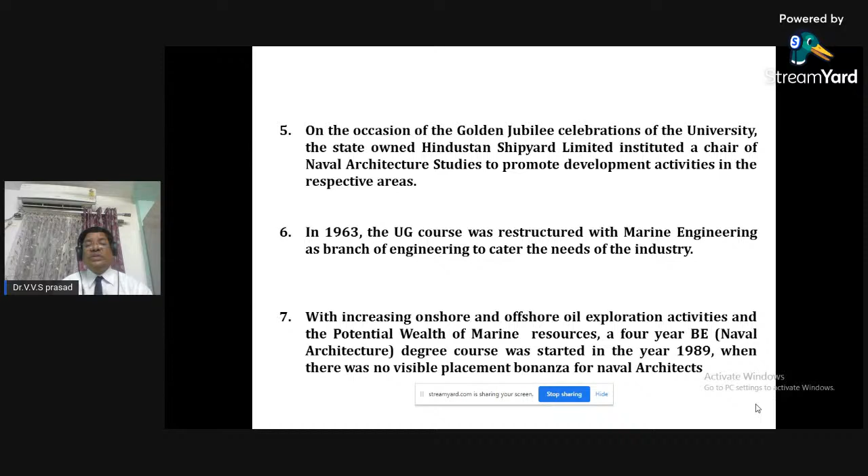In the year 1963, the undergraduate course was restructured with marine engineering as a branch of engineering to cater to the needs of the industry. With increasing offshore and onshore oil exploration activities and the potential wealth of marine resources, a 4-year naval architecture course was started in the year 1989, when there was no visible placement bonanza for naval architects.

The alumni of the department are holding responsible positions in the merchant navy, Indian Navy, shipping, offshore industries in India, abroad, and marine industries. The department has MOUs with the Institute of Marine Engineers, Naval Science and Technological Laboratory Visakhapatnam, Hindustan Shipyard Limited Visakhapatnam, and Dredging Corporation of India Visakhapatnam.

The main thing is the MOU started with IME(I), Visakhapatnam branch, is to start a facilitation center at Visakhapatnam. There is no such center in Visakhapatnam or in and around Andhra Pradesh. So recently, our Honorable Vice Chancellor, Professor PVGD Prasad Reddy Garu, has agreed to start one facilitation center in Visakhapatnam.

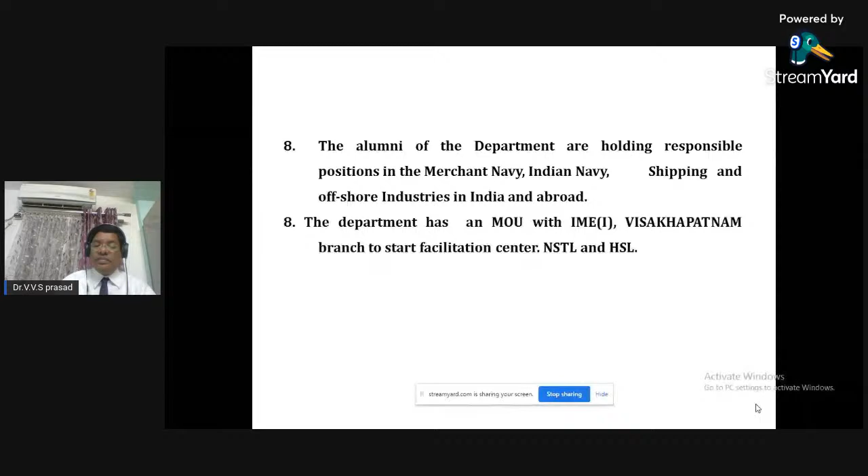What are the organizations recruiting students of this department? Mainly Indian Navy, Mazagon Dock Limited Mumbai, DRDO mainly NSTL, NSDRC Visakhapatnam, Hindustan Shipyard Limited Visakhapatnam, Visakhapatnam Port Trust, Dredging Corporation of India, Bharati Shipyard Limited, Cochin Shipyard, Indian Register of Shipping, DNV, American Bureau of Shipping, L&T, and software companies like

TCS, Wipro, and other companies related to core engineering. They are getting core engineering projects from abroad as well as in India.

Origin of the department: the department was actually merged in mechanical engineering. The marine engineering electives were started in the year 1963. Bachelor of Engineering in Marine started in the year 1971. The Department of Marine Engineering bifurcated from mechanical engineering in the year 1981, dividing into the mechanical department and marine engineering department.

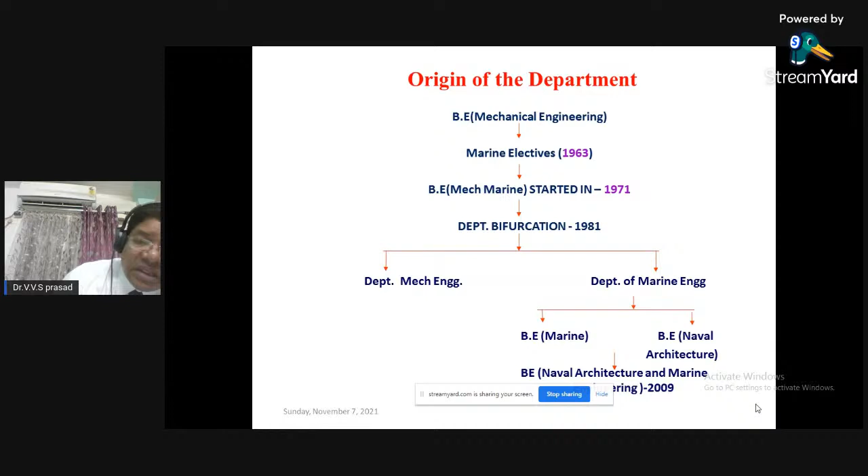At that time, there were two courses offered by the Department of Marine Engineering at the UG level: one is BE in Marine Engineering, the second one is BE in Naval Architecture. In the year 2009, we merged these two branches and now we call it Naval Architecture and Marine Engineering, with 30 students plus NRI candidates.

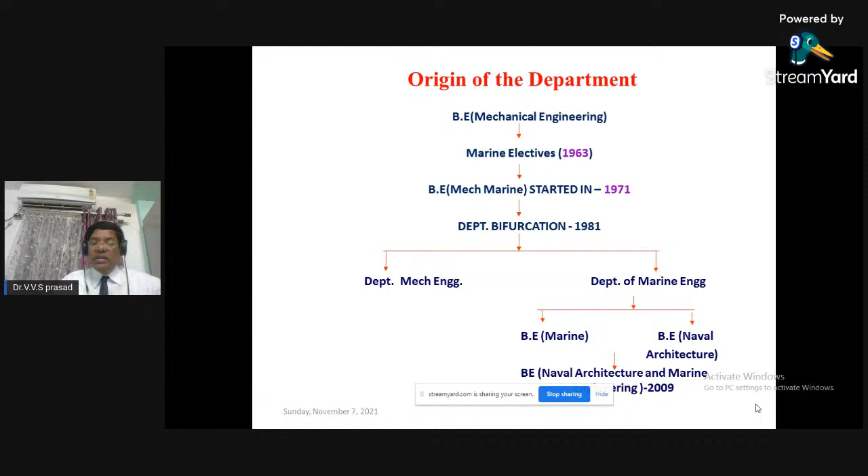Faculty are not only involved in research and teaching, but also in curriculum development, syllabus revisions, conducting training programs, short-term courses, workshops, industry-institute interaction, seminars, R&D, and some consultancy, pursuing PhD programs, presenting technical papers at national and international levels, attending conferences within the country and abroad, attending refresher courses, training programs, pedagogical training at prestigious institutes like IITs, IIMs, management programs at IIMs, and delivering guest lectures as part of knowledge sharing between industry and institution.

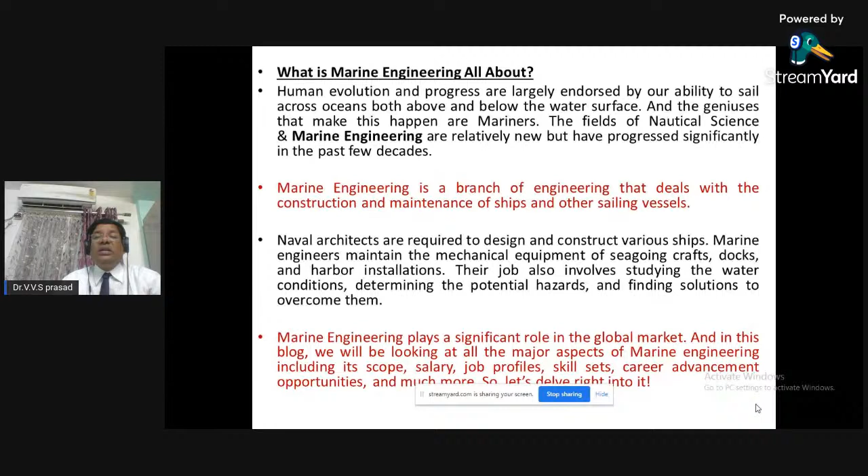Coming to what is marine engineering: human evolution and progress are largely owed to our ability to sail across oceans, both above and below the water surface, and the geniuses who make this happen are mariners. The fields of nautical science and marine engineering are relatively new but have progressed significantly in the past few decades.

Marine engineering is a branch of engineering that deals with the construction and maintenance of ships and other sailing vessels. Naval architects are required to design and construct various ships. This is the main difference between a marine engineer and a naval architect: marine engineering is for maintaining the mechanical equipment of seagoing crafts, docks, and harbor installations, but naval architects are required to design and construct various ships.

Their job also involves studying water conditions, determining potential hazards, and finding solutions to overcome them. Marine engineering plays a significant role in the global market, and in this blog we will be looking at all the major aspects of marine engineering, including its scope, salary, job profiles, skill sets, career advancement opportunities, and much more. So let us delve right into it.

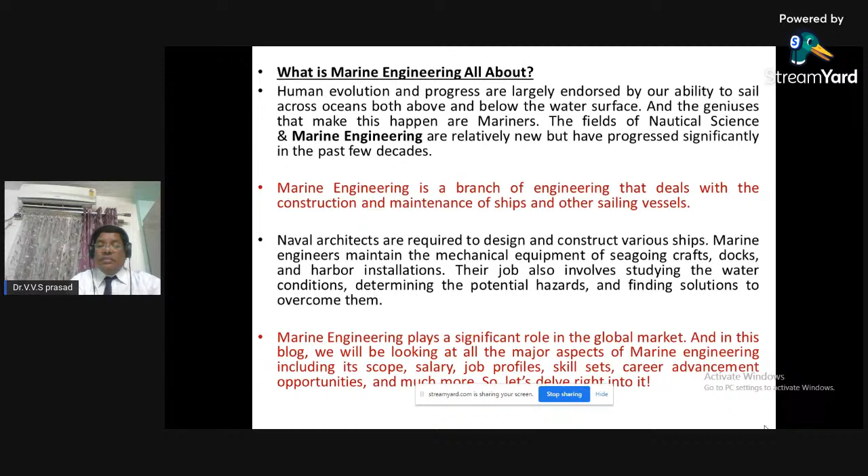What is the scope of marine engineering? Marine engineering is an emerging field with a massive scope for experimentation and career advancement. The shipping industry generates a myriad of career opportunities each year that are stable and lucrative. Skilled marine engineers have a rising demand in the global market.

A recent report suggests that the employment rate of marine engineers will witness a 12% growth till 2026. The growth is faster than the average growth seen in all other occupations. Some companies where marine engineers land jobs include shipping firms, Indian Navy, shipyards, Indian manufacturing companies, shipbuilding companies, ship design firms, maritime universities, research institutions, etc.

Let us further explore the job profiles of marine engineers. Marine engineer job profiles and salary.

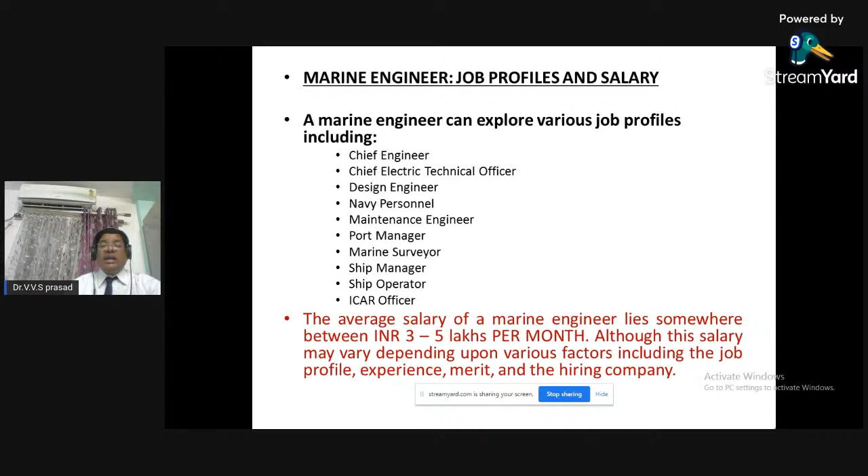Required skill sets for marine engineers. Apart from an affinity to the oceans and amazing swimming or diving skills, the following are the skills required for the field of marine engineering.

Reading comprehension, knowledge about mathematics, physics, and engineering concepts, design skills and critical thinking, effective spoken and written communication, knowledge about equipment requirement and selection of equipment, cooperation and coordination, scientific skill, problem solving and analytical skill, quality control analysis, accurate judgment and decision making, experimentation and active learning skills, attention to details, and time management.

So, in short, a marine engineer is a jack of all trades and master of all engineering branches.

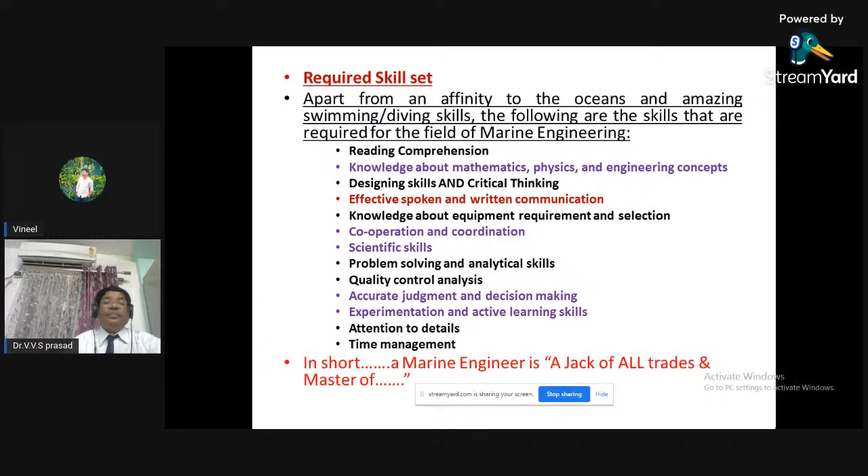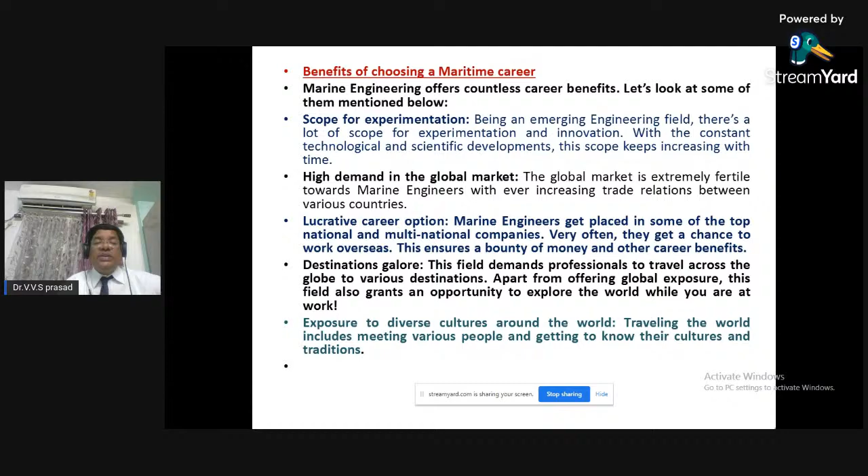Exposure to diverse culture around the world. Traveling the world includes meeting various people and getting to know their cultures and traditions. Not only that, there's also professionalism and adaptability, and an adventurous life.

Considering professionalism and adaptability, as this field has a global reach, it is vital. It teaches individuals to smoothly work in teams with people of diverse backgrounds and adapt themselves to any situations or challenges that may occur during their service.

Adventurous life: sailing across oceans is an adventure in itself, and working in this field ensures that you have a thrilling and adventurous lifestyle. This maritime career can be the best choice for those who are adventurous, have a passion to work overseas, have an affinity for the oceans, and are in search of career opportunities.

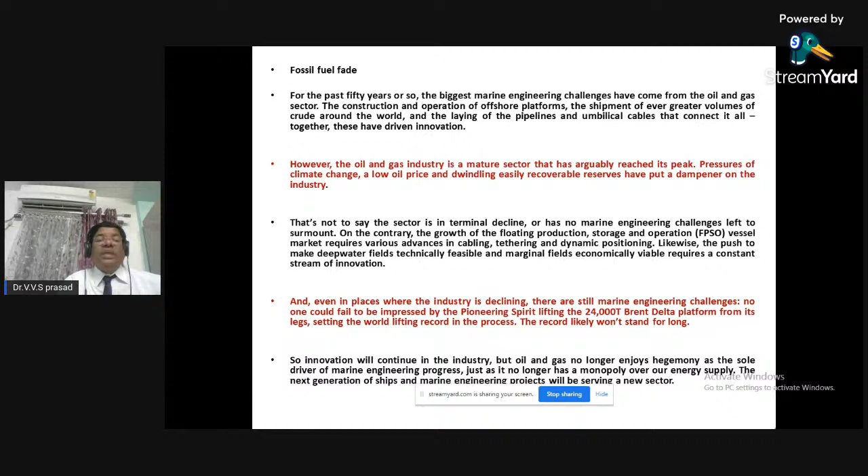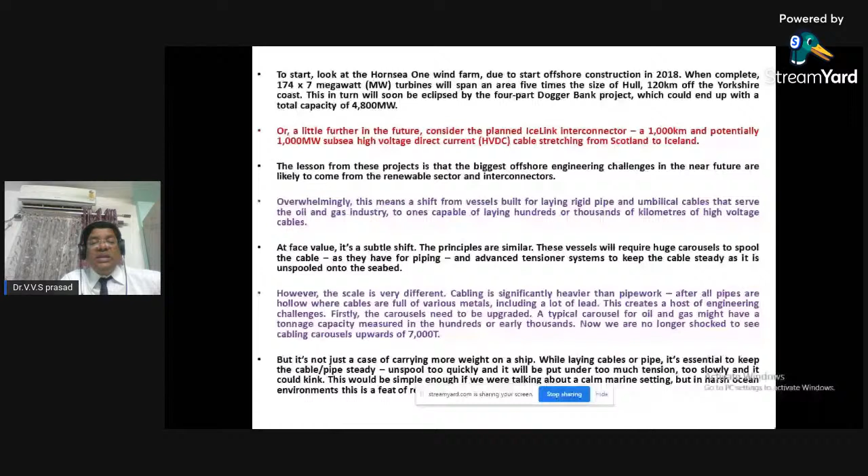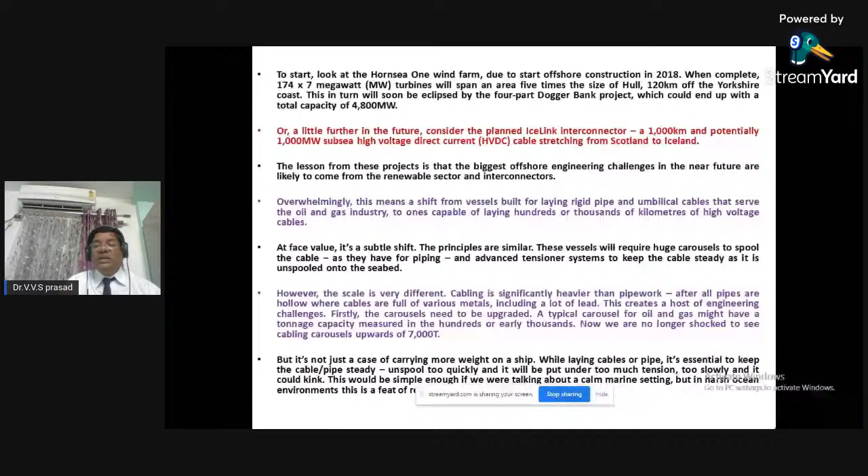But it is not just a case of carrying more weight on the ship. While laying cables or pipes, it is essential to keep them steady - unspooled too quickly and it will be put under too much tension, too slowly and it could kink. This would be simple enough in a calm marine engineering setting, but in a harsh ocean environment the facts are different.

To lay the cable safely at a steady pace, dynamic positioning systems must keep the ship in place, and the cabling equipment has to be capable of handling the pitch and heave of the sea. This was true of pipework too, but becomes much harder with heavier, often inflexible cabling.

However, perhaps the biggest challenge is that where oil and gas flexproducts are fairly uniform, cable laying requires much more bespoke design. The heavier carousel limits the options for where to place it on the ship, which has knock-on effects for fitting in the surrounding equipment too. As such, the entire deck layout comes down to the specific characteristics of the cable, driving much more tailored vessel solutions for each end user.

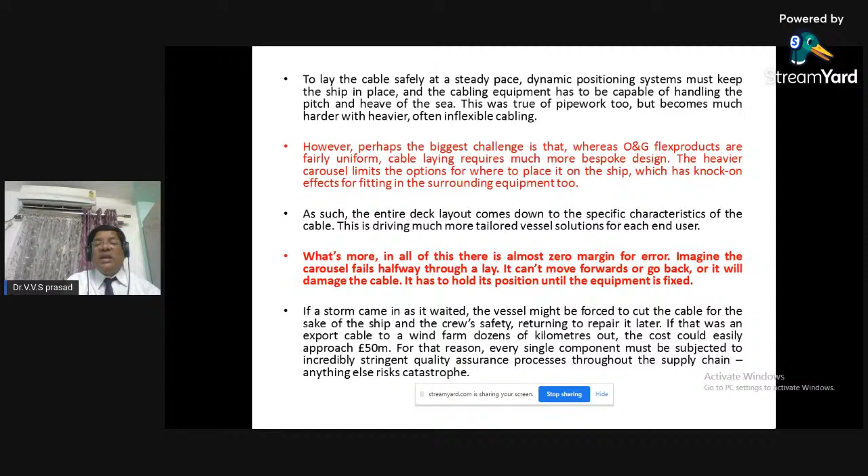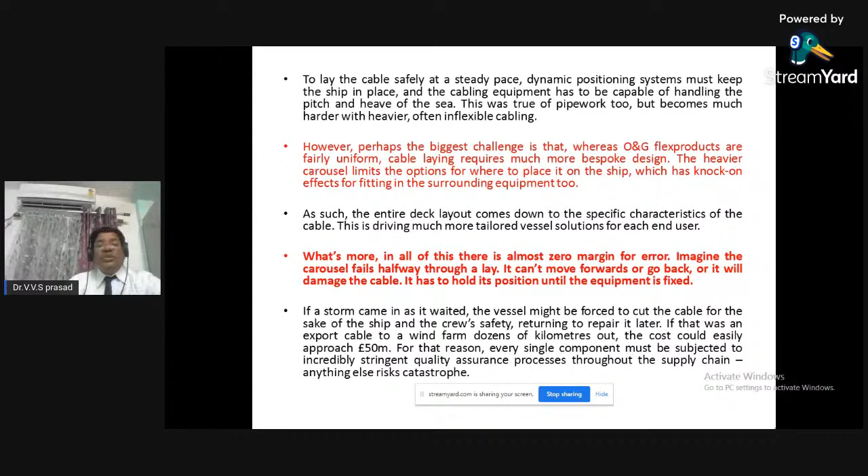What's more, in all this, there is almost zero margin for error. Imagine the carousel fails halfway through a lay. The vessel can't move forward or go back, or it will damage the cable. It has to hold its position until the equipment is fixed. If a storm came in as it waited, the vessel might be forced to cut the cable for the sake of ship and crew safety, returning to repair it later.

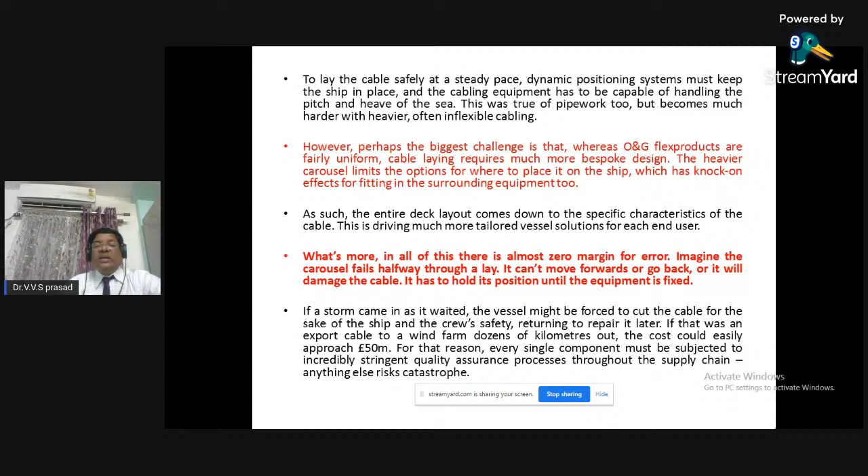If that was an export cable to a wind farm dozens of kilometers out, the cost could easily approach 50 million pounds. For that reason, every single component must be subjected to incredibly stringent quality assurance processes throughout the supply chain. Anything else risks catastrophe.

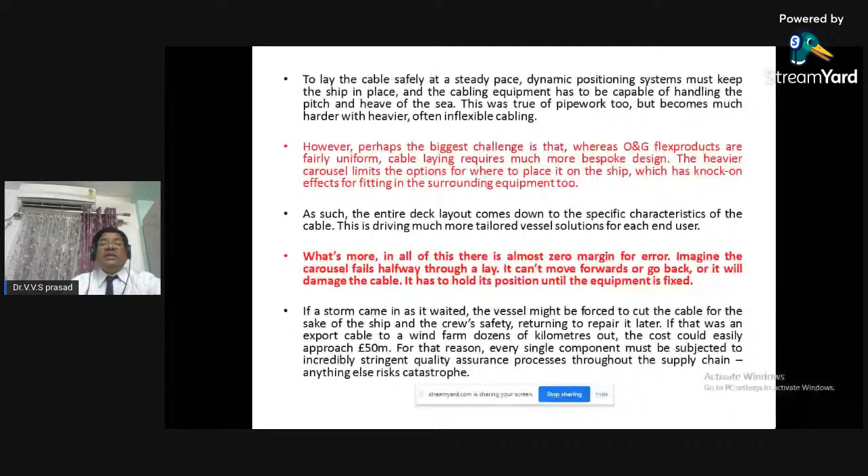Looking further ahead, these challenges are only going to increase. In 10 years, the 7,000 ton carousel that seems so gargantuan today will seem unremarkable. That's because wind farms are evolving - for example, compare the Westermost Rough wind farm to the aforementioned Hornsea One. Westermost Rough, operational since 2015, lies 8 kilometers off the coast, covers over 35 square kilometers, and consists of 35 6-megawatt turbines.

Compare that to Hornsea One: it's located 120 kilometers off the coast, covers 407 square kilometers, and consists of 174 7-megawatt turbines. That translates to a lot of extra cabling as wind farms grow in area.

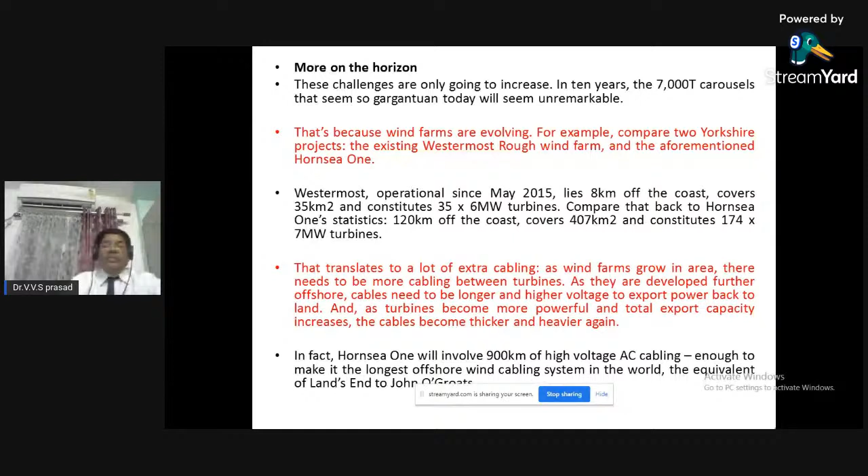There needs to be more cabling between turbines as they are developed further. Offshore cables need to be longer and higher voltage to export power back to land. And as turbines become more powerful and total export capacity increases, the cable becomes thicker and heavier again. In fact, one project will involve 900 kilometers of high voltage AC cabling, making it the longest offshore wind cabling system in the world.

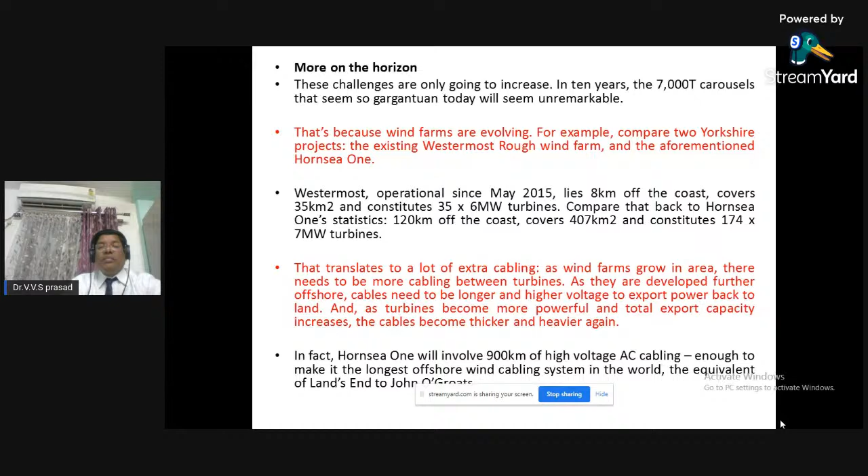It won't be long before the industry sees its first five-figure tonnage carousel. This will create real challenges for the marine engineering and shipbuilding industries. As tonnage increases, there will be fewer viable existing vessels for conversion, so shipbuilders can expect orders for larger new-built vessels designed for maximum stability in rough seas.

Marine engineers, for their part, will be occupied designing even more advanced carousels, tensioners, and related equipment to handle increasingly strenuous cable requirements, not forgetting the shoreside equipment needed to load the vessel in the first place. As society changes the way it approaches energy, the marine engineering and shipbuilding industries will change with it, adapting to serve new sectors and meet new challenges. After all, it's what they have always done.

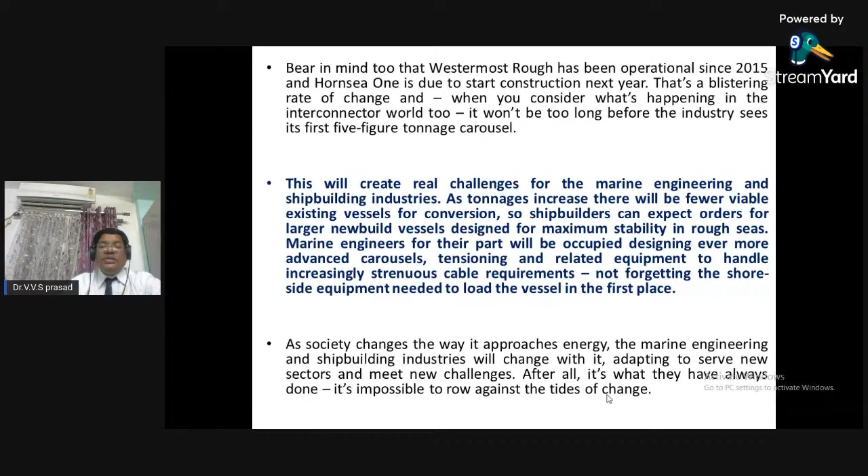It's impossible to row against the tides of change. And other challenges of shipping jobs - according to classification, shipping jobs or working at sea has been classified as one of the 10 most dangerous jobs in the world.

Although, as an outsider, it might sound surprising, but not when you consider how people think of it as a glamorous job. Ask a seaman, and he would enumerate various difficulties attached with the job. Careful examination of the prospective hazards makes one realize that this job is not for the weak-hearted. Those who get homesick easily find it difficult to work in a harsh environment. In every profession, there are a variety of professional hazards to deal with, and a person's ability to perform any particular job is tested on the basis of his response to these hazards.

Similarly, there are ways to deal with the professional problems faced on ships, and one should not be discouraged from taking up an exciting and rewarding career in the merchant navy. Strict physical fitness is of utmost importance, as any kind of shipping job is quite demanding, and the hardships one usually faces cannot be coped with without health conditions bordering on exceptional.

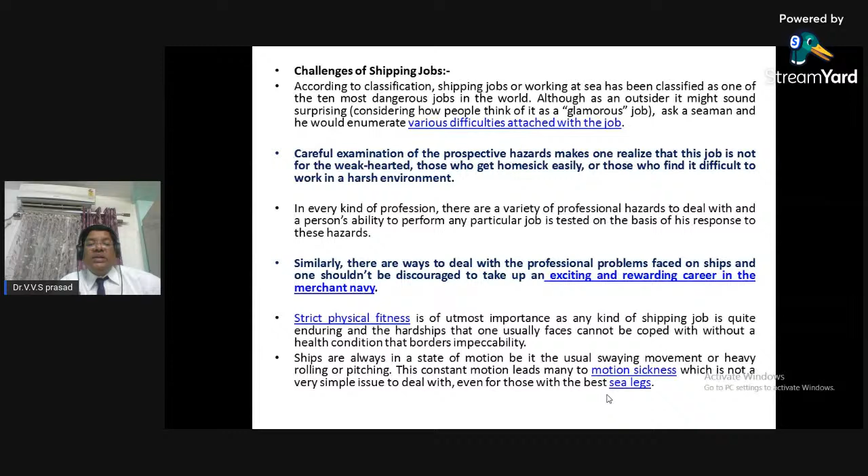Ships are always in a state of motion, be it the usual swaying movement or heavy rolling or pitching. The constant motion leads many to motion sickness, which is not a very simple issue to deal with even for those with the best sea legs.

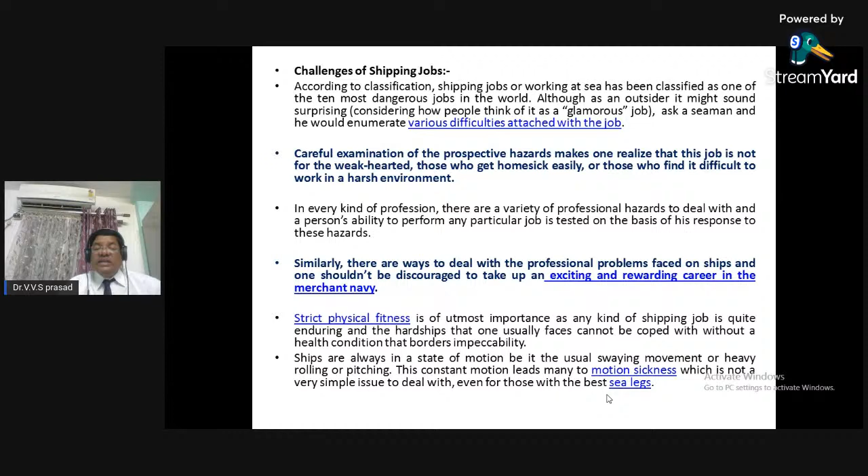Seafaring exposes the ship's crew to extreme temperature and weather conditions, especially during long journeys spanning many countries or continents, such as voyages to the bitter cold of Alaska or Scandinavia, and also to the hot and humid conditions of tropical regions or the Persian Gulf. A seafarer working on the ship should be fit enough to face any kind of weather and work in any kind of environment.

Accidents tend to occur frequently on the ship and are part and parcel of shipping jobs. The most frequent ones are often related to people falling into the sea, falling onto the deck, in the engine room, or from any of the ship's structures while working. Moreover, there are a large number of mechanical and electrical equipment on the ship's deck and in the engine rooms, and they have to be used very carefully.

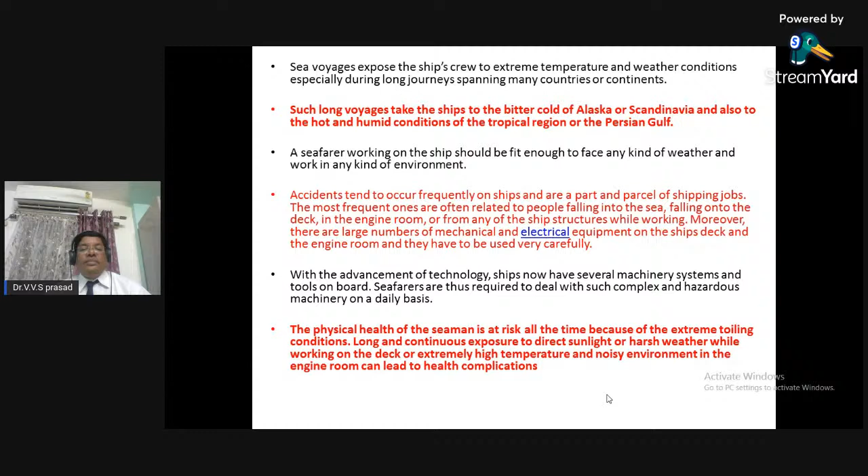With the advancement of technology, ships now have several machinery, systems, and tools on board. Seafarers are thus required to deal with such complex and hazardous machinery on a daily basis.

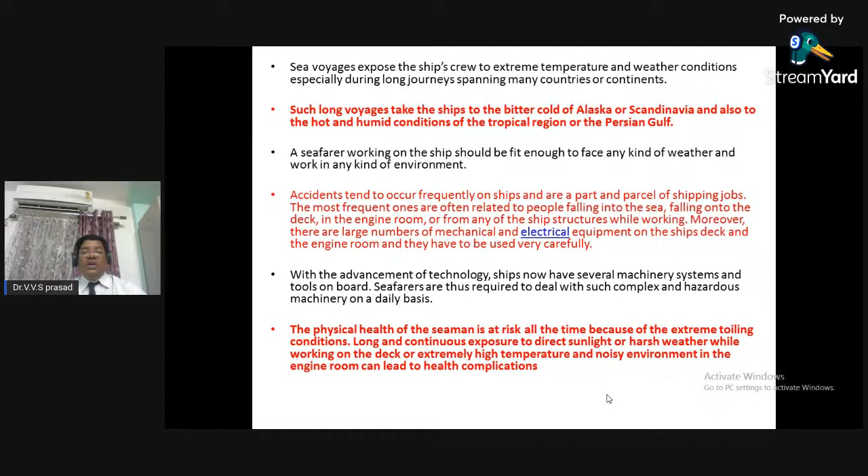The physical health of the seaman is at risk at all times because of the extreme and toiling conditions, long and continuous exposure to direct sunlight or harsh weather while working on the decks. Extremely high temperatures and a noisy environment in the engine room can lead to health complications. Long and close exposure to ultraviolet radiation from the ship's radar and radio has also been noted as one of the reasons for health problems in the past.

On some ships, the inner cabins and living quarters are not very airy or ventilated. They are at times noisy and hot, which are perfect conditions for the growth of germs, and only a truly healthy man with a perfect immune system can face it.

Although shipping companies take all the care possible for their crew and provide them with the best of what is available, it is the condition of the sea, the harsh and ever-changing weather, and continuous working hours which make shipping jobs difficult. A shipping job also attracts many physical and psychological problems for those who cannot keep up with hectic scheduling and lifestyles. Adding to them are professional politics and conflicts that arise between seafarers, making living on board ships more difficult.